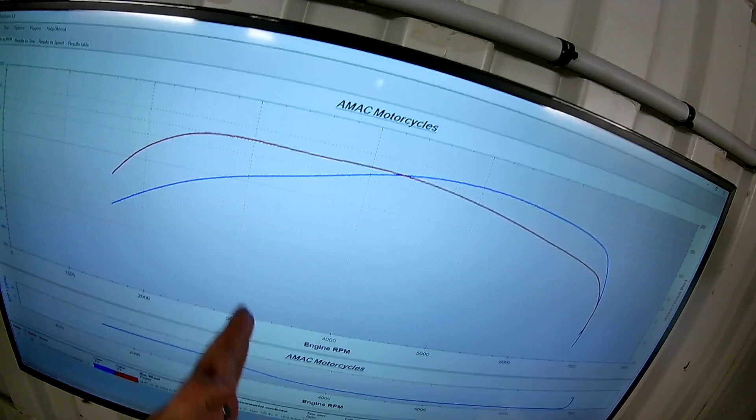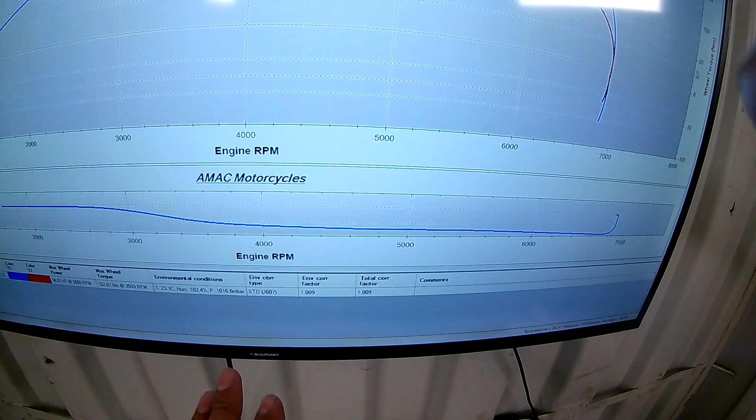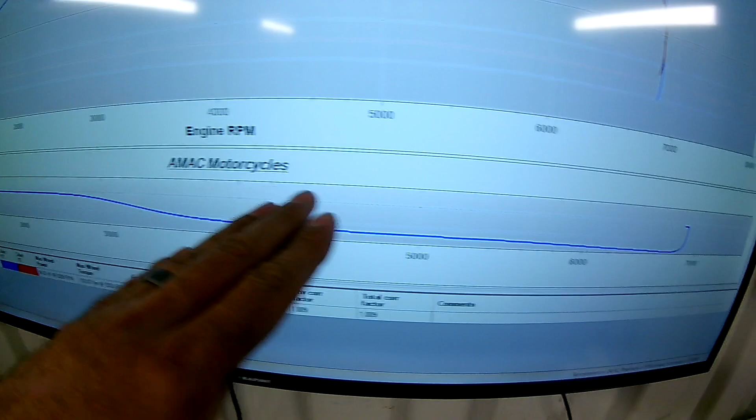So this is our pre-run. Nice smooth curve, making its peak torque at about 3000 RPM, peak horsepower at about 5000 RPM. Air fuel ratio is about 12.8. The fueling is actually pretty good on this bike, to be honest, it's just low down there where the client wants it nice and smooth. You can see it's a very lean air fuel ratio, and then it just runs into a very rich air fuel ratio, so we'll make that nice and consistent, progressive.

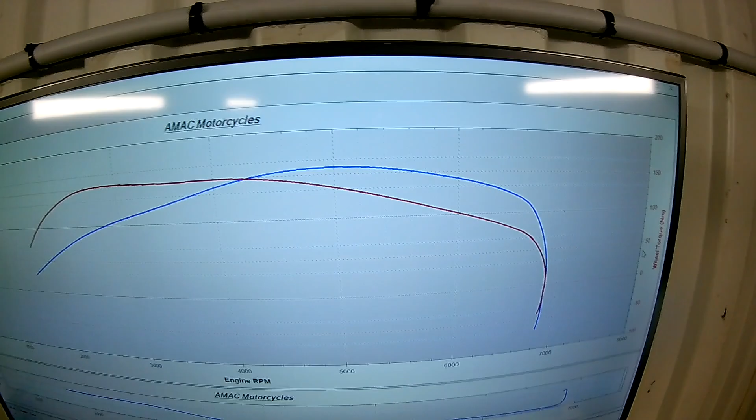Newton meter, so that's our pre-run. We will now get our ECU bin file all flashed in and then start making some changes.

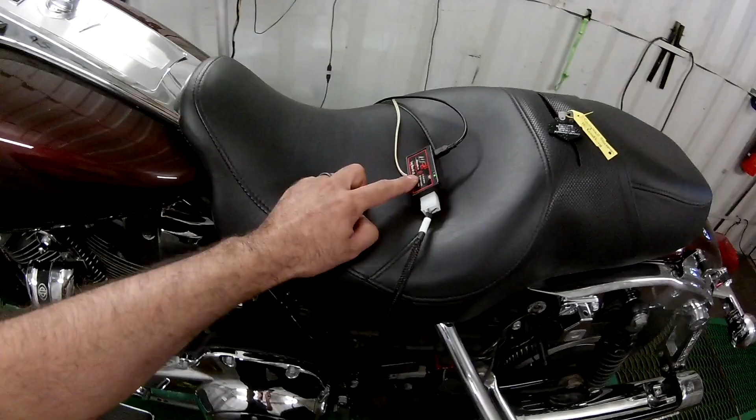After a bit of an issue, we're back with our Harley Road King. When we ended off last, the ECU was totally locked, so we had to use the TTS tuner the client had been supplied and reload the stock file saved on that back into the ECU so we could actually use our Woolich. That's where the issue is, because the original file Harley loads on these ECUs is the main file you'd need to do absolutely anything on these bikes because they're locked to the VIN number. Even the stock bin file from Woolich Racing cannot be loaded into these ECUs successfully - it locks the ECU unless you have the original map to install back. In other words, even Woolich's file is only used for reading the ECU, we still have to load back the original file. So a bit of a complicated one on the Harleys, but when it starts going smooth, it goes smooth.

We're back in business. I've written the new mapping in, just base changes, so we're about to start doing some fuel logging and then we'll see where we're at. I'm pretty happy with my changes - I've made some ignition timing changes. We're going to check our ignition timing with the knock sensor to see if we get any detonation under load. Normally we'll go to peak torque, lock and load there, then get in high gear and accelerate up to see if we can get any detonation under load. Stay tuned, we're going to do some fuel tuning.

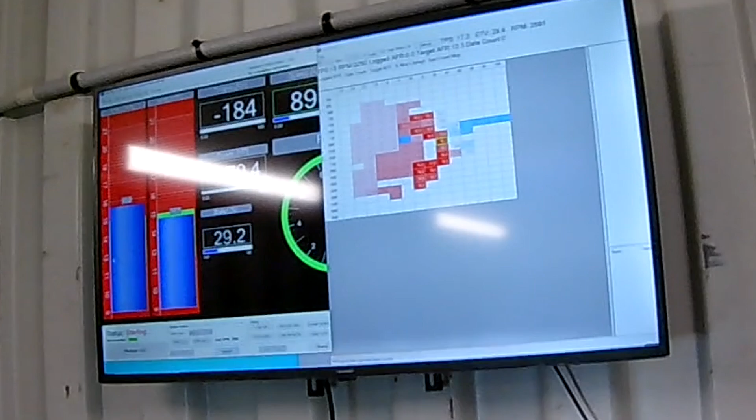As you can see, we are getting detonation quite hectic, even at low RPM, low revs. I just want to show you on our ignition timing now, where we've given it that 2 degree advance - we're going to take that back 1 degree and drop it down low, where you can see between 2 and 3000 RPM it's got quite a big ramp up. So I was just being a bit aggressive with the timing.

I'm going to back that off and then we'll get back into our fuel tune and make sure we've got no detonation. That's why it's so important to have the correct equipment to tune motorcycles, because once this bike leaves here and the client's riding up hills and in cold conditions where the air is more dense and the fuel mixture might be a bit leaner, he's going to run into these detonation problems, and it's going to gradually eat his piston away, cause more strain on the piston, break the ring lands, and he's in for an engine build. So we just need to be super careful and cautious with ignition timing.

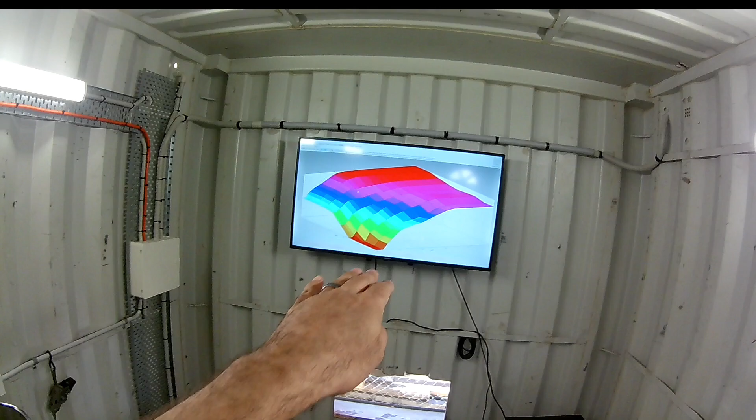Although if we've got the correct equipment, you can be very aggressive and know, hey, I'm getting pinging at this RPM - pinging and detonation are the same term. Let's just back all that off, drop it down a degree or two, and retest to make sure that under extreme circumstances we're getting no detonation.

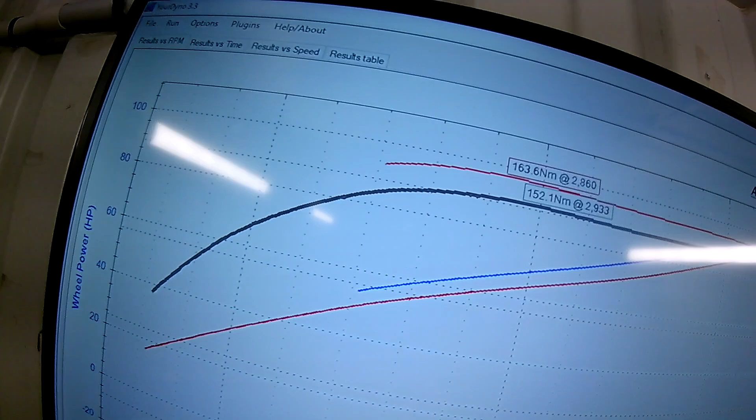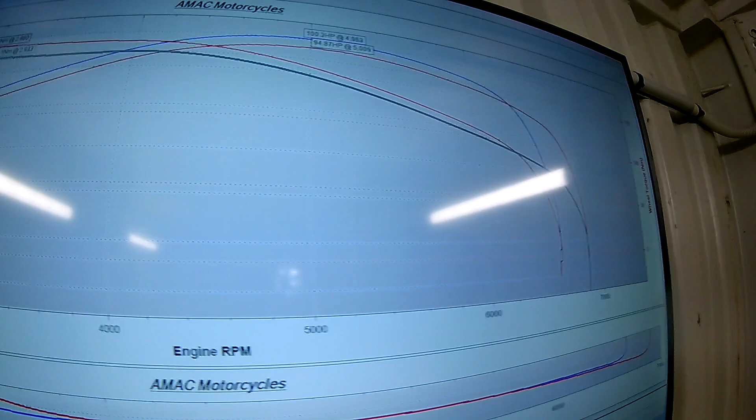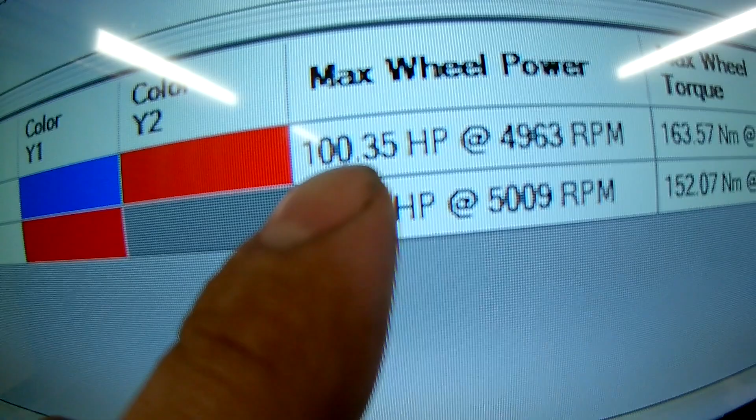Right, so final results on our Harley Road King. Here we go - there's a nice smooth curve, you can see we've gained power right through the rev range, torque and horsepower. But with that issue of the ECU being flashed with TTS, the rev limiter was raised almost to 7000. Stock is 6000, so we spoke to the client and he wanted it at 6.5. That's why you'll see us not revving out to where it was, but you can see a nice power gain the whole way. Final specs: 94 horsepower to 100 horsepower, and 152 Newton meters to 163.5.

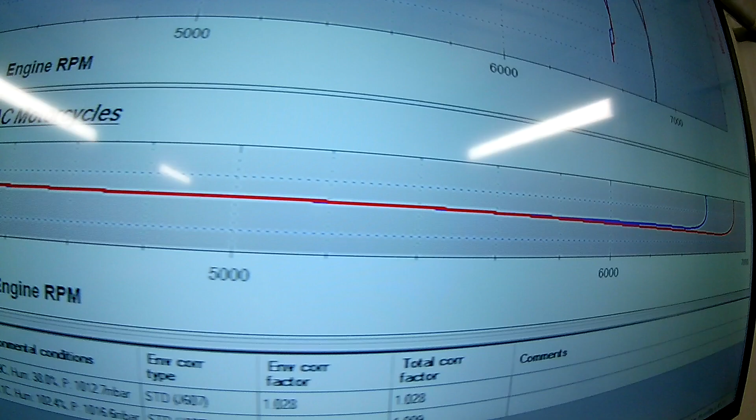The fueling, you can see, is nice and smooth the whole way through, so that's all sorted, there's no more. You can see before it was running off the chart there, too lean, very jerky, surgy mixture. So that's all good to go. Stay tuned for our next video.